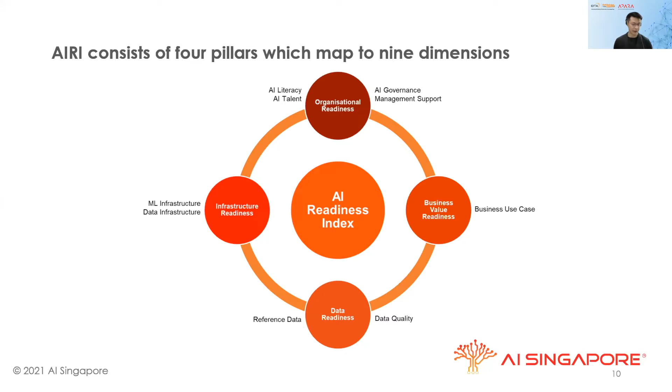So these are the four main pillars we look at. For organization readiness, we are looking at whether the organization has the foundations to embark on an AI initiative. Because without, for instance, good management support, more likely than not the AI initiative will fail, because AI will often require changes in business processes. And without backing from senior management, it will be very hard to get different departments to come together to embark on that AI initiative.

For business value readiness, we're looking at whether any use cases have been identified in the organization and the potential value they bring, because otherwise management might not see it as a priority to put resources into certain areas of the business and apply AI to them. For data readiness, we're looking at whether the organization has reliable, quality data, because AI is trained on data. Without data being collected by the organization, it will be very hard for AI engineers to do anything.

And lastly, for infrastructure readiness, we are looking at whether the company has the right infrastructure. We are looking at machine learning infrastructure, because we simply cannot deploy an AI model on your laptop, even the latest one, because the computing resources required by AI are far more intense than what your laptop can handle. So we're looking at whether the organization has sufficient IT servers, for example, or is using cloud computing to support rolling out AI solutions. So that's the four pillars.

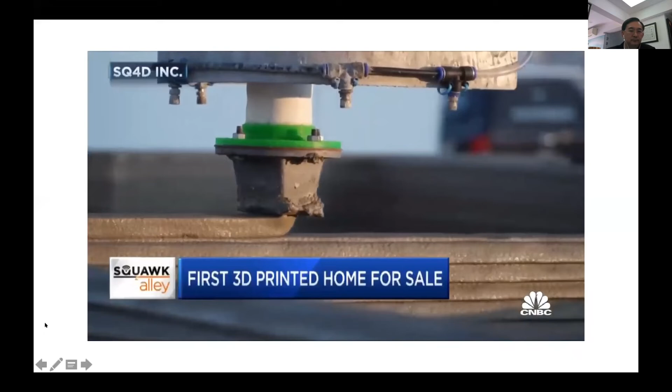It may look like toothpaste, but this 3D printing technology is spitting out a 1,900 square foot house. The concrete foundation, interior and exterior walls, and utility conduits. This is the final product. We're trying to build houses in half the time for half the price. New York-based SQ4D printed the model home in about 2 days with barely 3 workers, and it's cheap. Our profits will be higher, and we will be able to show that with more projects that we do. How do you sell a 3D printed house? I'd like to think it sells itself. What is the weirdest thing anybody has ever said to you when they walk into this place? Oh man, is it plastic?

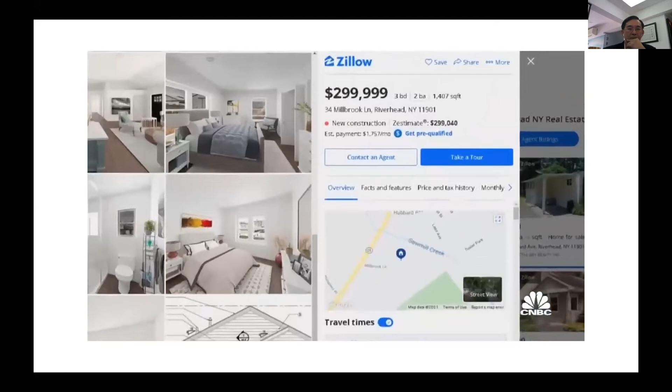The company now has the permits to build on this site down the road, the first 3D printed home for sale to the public. 1,400 square feet, 3 bedrooms, 2 baths, listed at just under $300,000. That's about half the price of a comparable new home in the area. The offers are in the thousands. People are seeing the price across the nation and loving that. It's put out layer by layer by layer, 2 inches thick. Potential buyers like the Johnsons from Kansas City are already lining up. We've been looking since September of last year, and in the 2 counties it's just impossible to find anything at this price. And this quality.

So this is the result, the raw result of 3D printing. It's kind of like concrete corduroy, but if you don't love this look, they can smooth it out for you and make it look just like a regular wall.

But for the home builders, this is a real game changer. Right now, they're up against a severe labor shortage as well as skyrocketing prices for lumber, and both of those are combining to just make their costs really, really difficult right now. So this could address both of those. Back to you guys. Yeah, Diana, that's amazing.

And the argument now largely seems to be price for 3D printing and what it can do in real estate. But 3D printing technology should allow companies to create shapes, perhaps do things with engineering that are impossible under traditional methods. Do you think that there's a premium end of this 3D printing and construction market?

Absolutely. In fact, we were talking to the builder about what the outside of the house could look like, and he was saying that you could put literally any image into the 3D printer and customize the outside of the home so it would look like shingles or it would look like a different type of wood. You could even put your face on the front of the home if you wanted to. So the possibilities are really endless with the technology.

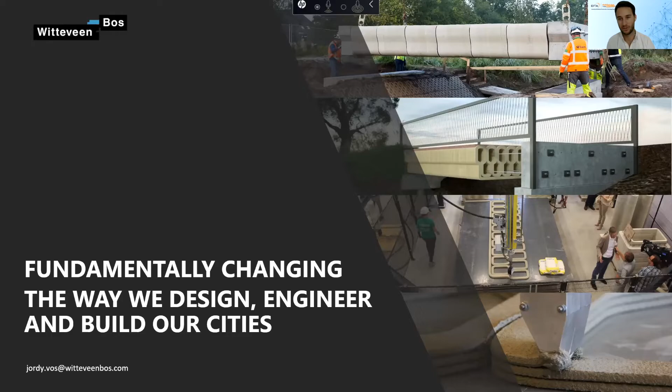So in this session, I'm going to talk about how we are fundamentally changing the way we design, engineer, and build our cities, which includes 3D concrete printing. I will get to that by the end of the presentation, so please hold on. As introduced, I'm working for Witteveen+Bos. We are a consultancy and engineering firm. We work on all kinds of projects related to infrastructure, building, water, and environment, almost 4,000 projects per year. My team focuses specifically on digital construction, which is all about automation and digitalization of the construction industry. We're active in 11 countries, headquarters is in the Netherlands, and I'm based in the office in Singapore.

So let's start with this. As civil engineers, we're responsible for big accomplishments in the construction industry. Think about almost 1 kilometer high buildings in dense city areas, mega dams that produce sustainable energy, massive bridges and tunnels that connect people throughout the world, and dikes that protect countries against flooding.

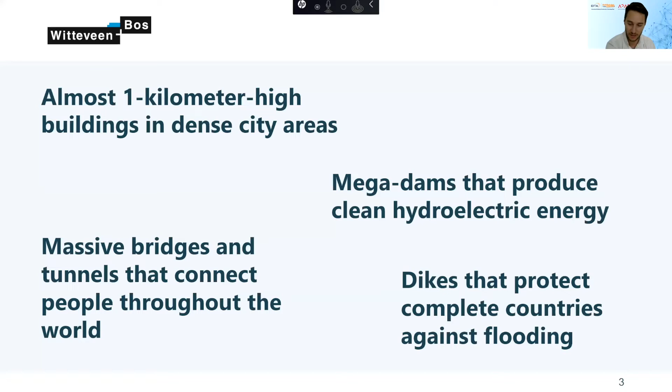But the industry is also, as you probably know, facing some challenges. It's responsible for almost 39% of worldwide CO2 emissions, which also includes the operational phase of the buildings. And productivity is quite a bit lower compared to other industries, almost 30%. And there are more issues, as you are most likely aware. But as one of the biggest industries worldwide, almost 13% of the world's GDP, making an impact on our industry will make a very big positive impact worldwide. So that's a big opportunity. Therefore, I think we should change the way we design, engineer, and build our cities.

So let's have a quick look at how the construction industry is typically organized. It's very project-based, right? Every project, we start from scratch. We develop a project with a certain economic idea behind it. We design it, engineer it, all completely from scratch. We set up the whole project organization with all kinds of parties involved, often temporary subcontractors, even temporary staff, temporary rented equipment. And with all of this together, we construct the building bit by bit in a manual way.

All of this together leads to a very fragmented industry, a lot of manual work, a lot of parties involved, very hard to coordinate, almost no repetition or standardization, and therefore very hard to industrialize. Complex contracts because so many parties are involved, a lot of risks, and the risks are often moved down the value chain instead of actually being properly addressed.

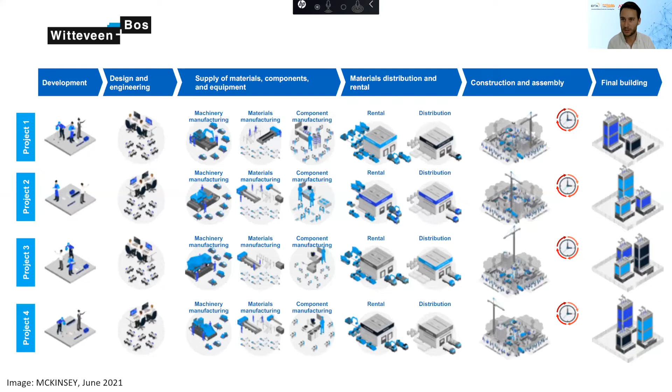And this leads to the fact that there's almost no economies of scale opportunities, no industrialization, and risks for time and budget overruns. Almost no budget left for R&D. But there are quite some catalysts and emerging trends right now that will change this in the coming years.

As was mentioned in the video just now, a shortage of skilled labor in the construction industry, increased need for affordable infrastructure and housing, as was also mentioned in the video, but also stricter regulations for sustainability, safety, repeatability, increasing requirements from customers and owners.

But on top of that, we have also the emerging trends like 3D construction printing and other industrialization, like automated precast lines. Digitalization is getting there. BIM is almost a standard in any project. New and sustainable materials and new entrants are entering the market. And I think the presentation from Bina after my presentation is a great example of a typical new entrant for the construction industry with a new approach and vision on the construction industry.

So based on this, the expectation is that the industry will change. And this is not invented by myself. This is coming from McKinsey. And they think that the construction industry will go from a project-based approach to a product-based approach. So we work more with standardized products, and buildings are designed with those standardized products.

And those products are manufactured in places who are specialized in producing that part and can deliver a consistent high quality at a consistent price. And the construction process becomes more assembly of all those building components. The value chain will become less complex, less parties involved, companies will become specialized, and certain larger players will control or at least overview a large part of this whole value chain through digitalization. And AI is an important part of this, for example, to predict what is going on in the processes.

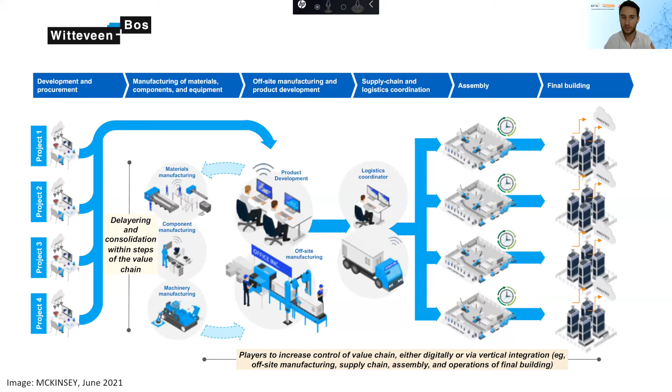And therefore I would like to show you a few seamless digital tools and processes that we are working on that fit perfectly to this. And I will end with 3D concrete printing as one of the tools. So one of the things that we're working on is, for example, parametric design. With parametric design, we can create an endless amount of variations of what I call a design family. So it's a similar looking design, but you can change the design by just updating the parameters, from the length, the width, the height, even the shape.

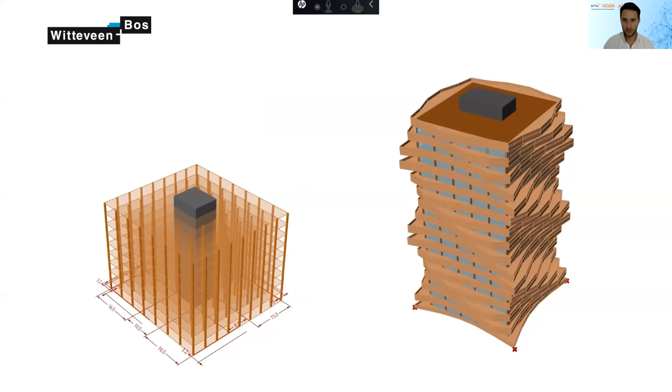And we can generate all these designs with just a mouse click, because it's what we call a computational design. It's basically set up with a sort of software script that generates the design based on our input. So it takes a bit of time to set it up, but once it is set up, you can generate all these designs. And this is also product-based, right? Because there's a lot of repetition in the type of building components in these designs. So that helps a lot to work towards it.

Moving on to the engineering stage, there are a lot of disciplines involved in the engineering of a building. Structural engineering, acoustics, mechanical engineering, and so on. And they all need to exchange a lot of information with each other. And because every project is so new, they need to start from scratch every time again. Therefore, we are developing a platform called ANT to connect all these different applications with each other, and also take data from databases as starting points for those calculations.

So with a product-based approach, we can use all those properties from those known products and use that in the structural calculations, for example, without figuring out every time again what the properties are of this wall and which concrete we need to use, all standardized, speeding up engineering processes a lot and avoiding, for example, mistakes in those processes.

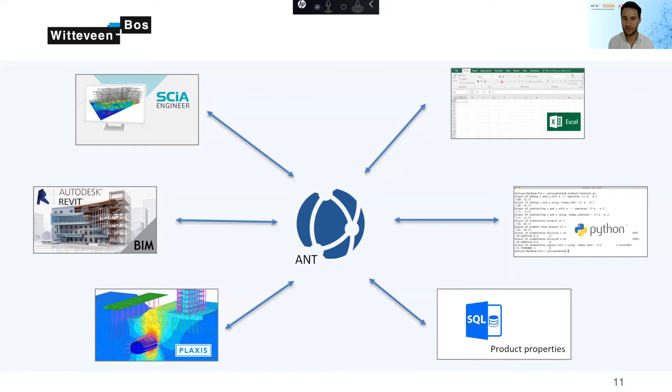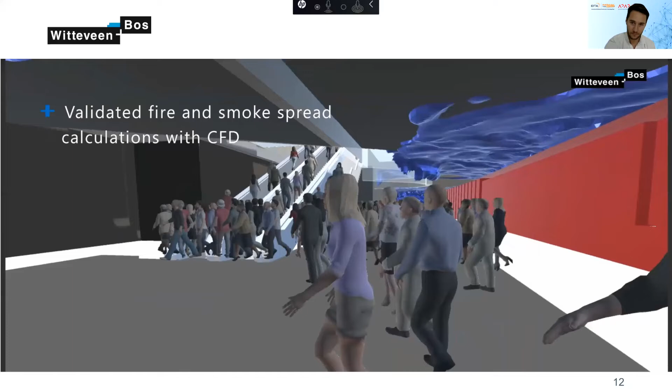And we do the same with, for example, infrastructure designs, where we have developed a driving simulator so you can drive over a highway in virtual reality.

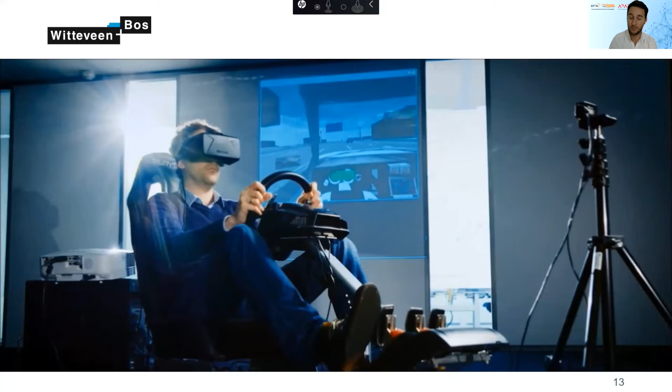This is all based on the digital 3D models that we create. And the traffic that you see in this kind of serious game is coming from real validated traffic simulations, certified traffic simulations that are used to calculate if a junction is, for example, able to handle all the traffic. And this is live integrated in the serious game, so you can actually experience real traffic in the game and validate the design together with your stakeholders.

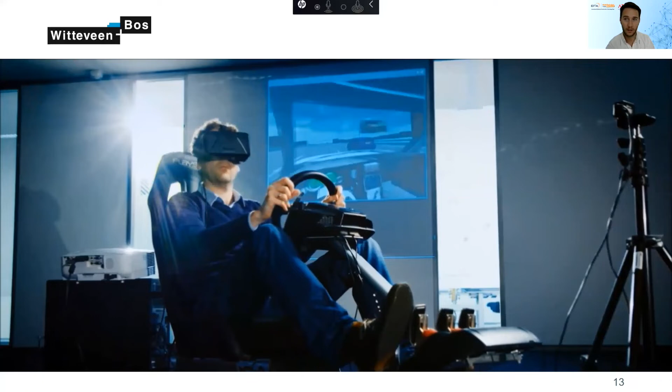So this all helps to get your stakeholders on board, make informed decisions, use your digital data, including AI, to make the right decisions. And also during the construction phase, we are developing an online platform that helps to manage all of this. We are doing this together with the Housing and Development Board.

This is a typical single source of truth that was mentioned in the previous AI presentation, where we collect all information related to the design, the manufacturing, the assembly, contract issues, documents in a central place, manage it all from there, single source of truth, making the information available for everyone, anytime, from anywhere, in an online web-based platform. So this is completely developed in-house for HDB.

And the beauty is that all information is connected to each other. So changing something here will also change something there. Or if next week the assembly of a certain amount of components is planned, but the manufacturing is behind the schedule, we can see that in the platform and we can adapt to that to avoid, for example, any delay.

So this typically avoids budget overruns because we closely monitor everything, time overrun because we signal potential delays early, and we avoid rework and mistakes because everyone is making use of the most up-to-date information. So no outdated drawings anymore, and so on.

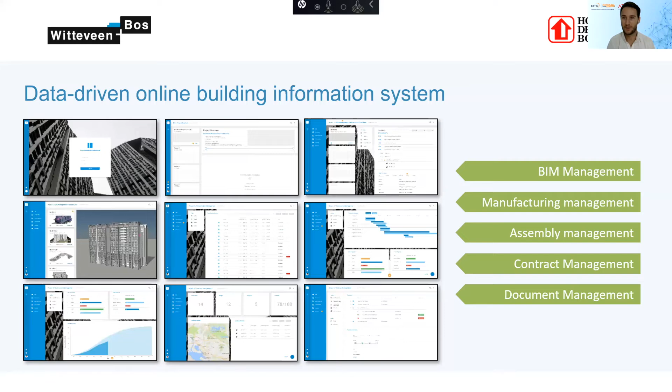And then moving over to construction, this is where 3D concrete printing comes in. This is technology that we are now working on for almost 6 years already. This started for us with a research project in the Netherlands at Eindhoven University with a whole group of partners. And meanwhile, we are working on this 6 years and we are working towards pilot projects to implement this technology with a large group of partners involved.

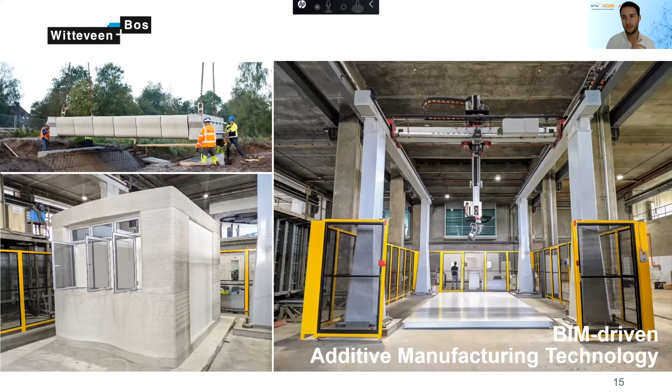Additional design freedom because we don't need those flat formwork panels anymore. We save on manpower, save on material. We only use material where we actually need it, and I will jump into this a little bit more. But also this you can see as a kind of product-based approach where components could be manufactured off-site, for example, for high-rise, modular, and stacked.

And there's still a certain amount of design freedom when using 3D concrete printing because you don't need the formwork, but there is a certain standardization in the connections, dimensions, the waterproofing, all those kind of things that you can standardize. But without the formwork, we can still offer design freedom in a product-based approach.

So let's have a closer look at construction 3D printing. How does it actually work? Well, construction 3D printing is completely centered around a robot. And this can be any robot actually, because the whole idea of this robot is that it's moving a printhead. So the robot can be a typical robotic arm that are used a lot in automotive manufacturing. Can be a gantry robot, and there are also quite some robotics developed specifically for construction 3D printing. But in the end, it's always moving the printhead.

The printhead is extruding concrete, and this concrete is placed layer by layer to form the desired object. And the concrete is coming from a mixing pump that is mixing a dry material with water and pumping it to the printhead. All of this is controlled by a robot controller that includes the robot and the pump and the mixing process. And this robot controller is receiving instructions. The instructions are coming from a file that we generate based on our 3D model.

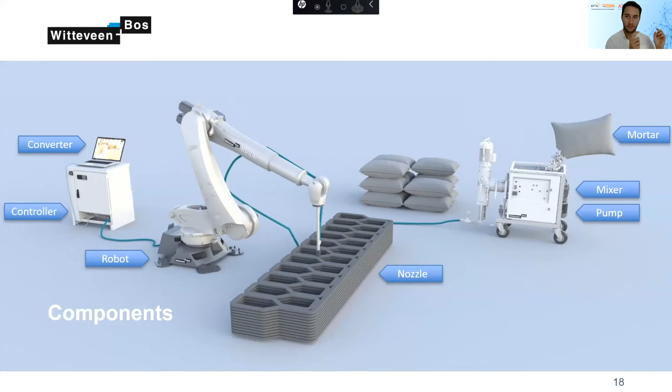So this is again the link between us as engineering firm and 3D concrete printing, which is more basically for a contractor who's actually doing the execution. But we have the 3D models, and we can send those 3D models to a 3D printer. So there's a very short lead time from design to manufacturing, which brings up a lot of opportunities.

If you control all of this in the correct way, you're able to 3D print concrete components layer by layer without any formwork, barely any labor involved, and no material waste, for example, because we only use concrete where we actually need it.

So I really believe in this technology, not only because it's 3D printing, but because it's a great base for many other robotic technologies that can connect to this or work in the same way; it provides a kind of platform to make all of this possible. Think about, for example, fabrication of rebar cages that in other research projects are being done with robotics already. This can be integrated in the same type of robotics, produced based on the same type of 3D models, managed with the same type of software.

So that's the rebar, but also the surface finishing can be done already during printing with an additional robotic device. And after printing, you can think about the so-called single task robotics. We can do the tiling or painting, like spray painting, all those kind of things. So that all can be done in the same kind of platform. And that is why I believe in this technology.

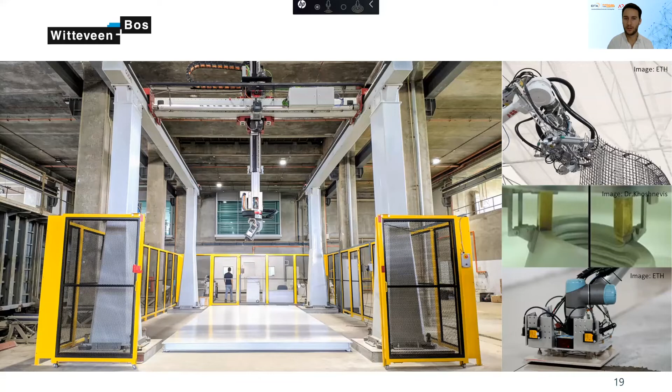So like I say, for construction 3D printing, we have a relatively product-based approach where we develop parametric objects that can be 3D printed directly without the need for any design and engineering. Just type in your parameters, like you want urban furniture. Here we have 3 examples: an urban bench, a planter, which we call a green wall because you can place the plants in the wall, and a staircase. So whatever dimension you need, you type it in, the length, the width, the height, and it generates the design, and we can send it directly to the printer.

And we have set up the model in such a way that whatever parameter you type in, it will be printable, right? It will have a certain limit for the length, the height, and the width to make sure it's printable. So this is where we save a lot of time on the design and the engineering.

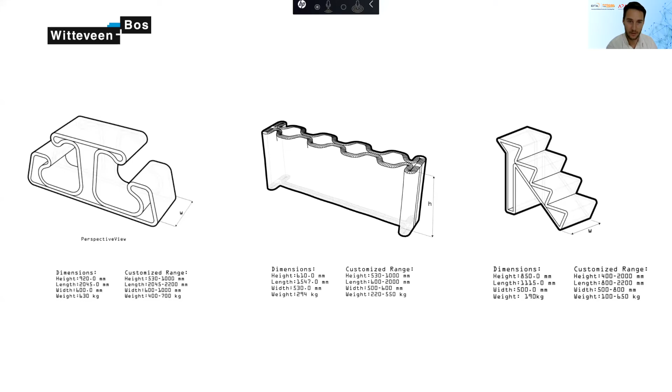And we are working on a pilot project to apply all of this in a true construction project. An example of that is Project Milestone, which is done by the group in the Netherlands. We've also been working on this research project since the very beginning, and they are developing livable houses where people can actually live. That means they're permitted, follow standards, design codes, and so on. There's a lot of research work going on in the background that I don't have time to show today to make all of that possible.

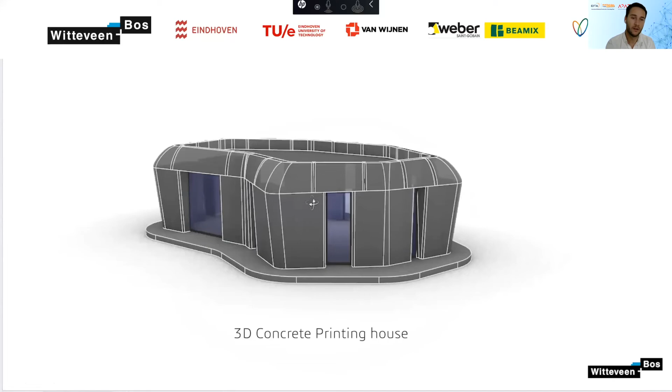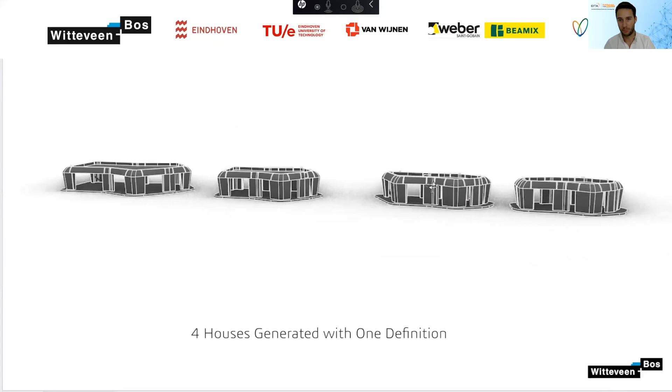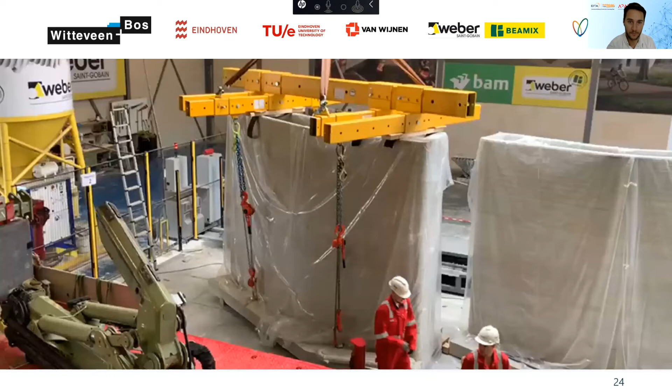And this already takes into account the printing capabilities of the printer that is supposed to print it, in terms of size, dimensions, connections, and so on. That design can be sent to the 3D concrete printer. Of course, there is still quite some verification in between, I'll get back to that, to make sure the structure is safe. But the printer can directly operate from the 3D model, print the building components, and then we can transport them to the construction site.

So the first house was opened last month. The first residents are now living there. So that's proof that it is a true livable house. If you look inside, it looks beautiful, just like in the video that you saw earlier. Also in this house, the printed layers are still present in certain areas to show it is 3D printed, with a very consistent layer that actually is a nice architectural feature of the house. And to me, it definitely looks like a great house. I would love to live there.

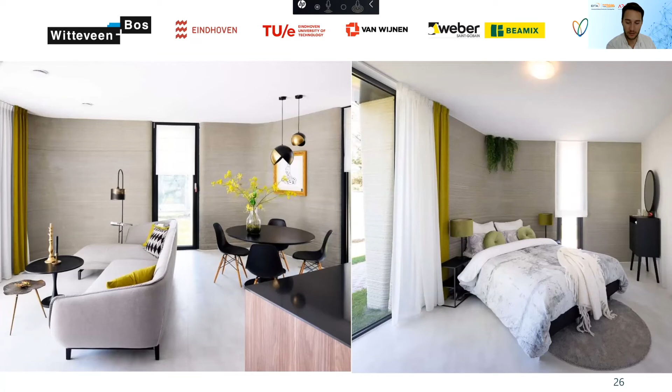So let's talk about why we would do all this. Why would we 3D print a house? Well, of course, the tailor-made houses that are generated with the parametric designs allow us to create a house exactly the way you want it, with a lot of design freedom. Cities don't look boring. You can create neighborhoods where every house looks a little bit different and gets its own character. These houses can be printed on demand by the 3D printers based on digital designs.

Short lead time, it can be done faster, less labor, a way less complex supply chain. As consultant engineers, we're sending it to the printer. So the whole process becomes simplified, with way less chance for errors and mistakes, for example. And we can use materials effectively, with no production waste.

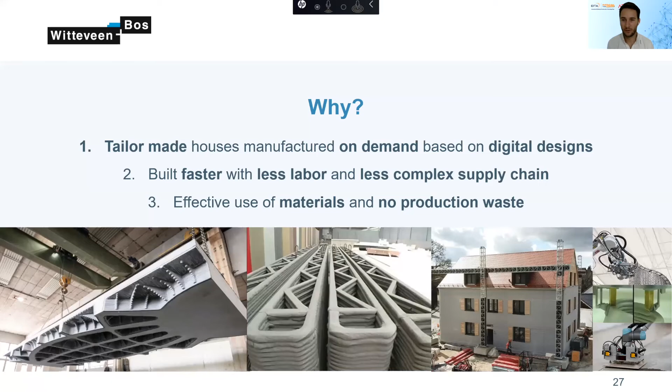Yeah, the technology is still in a relatively early stage, I would say. That means there is no design code or standard yet that tells you how you should calculate or design such a structural component or complete house. Therefore, we make use of the Eurocode, design assisted by testing. There's a whole testing program to validate that whatever we calculate is correct and works the same in practice.

We do material tests to find out the material properties. We use that to do calculations. We produce a scale model and do destructive testing to test if our calculations were correct. Then we print the final model, test it one more time to check if it can handle the design load, for example. And by using a product-based approach, we can reuse all of this in the next bridge.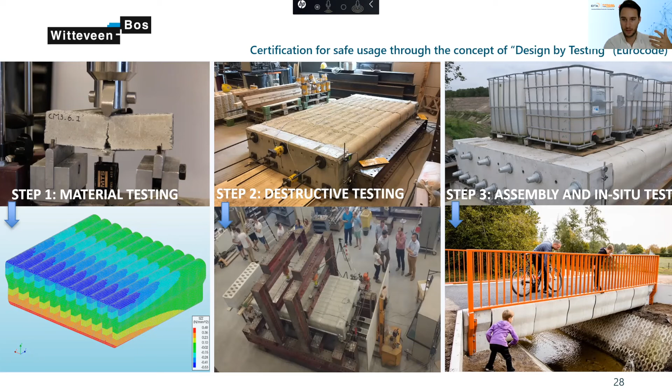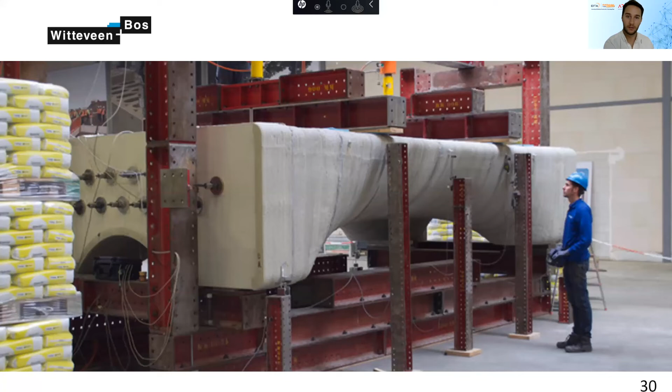So we're working on a bigger bridge right now. It's longer, but the span is similar. So it has similar bridge components, slightly different shape, but similar principles. And in this way, we can evolve the bridge and also reuse a lot of information and data. And this next bridge is now being assembled at the moment, actually.

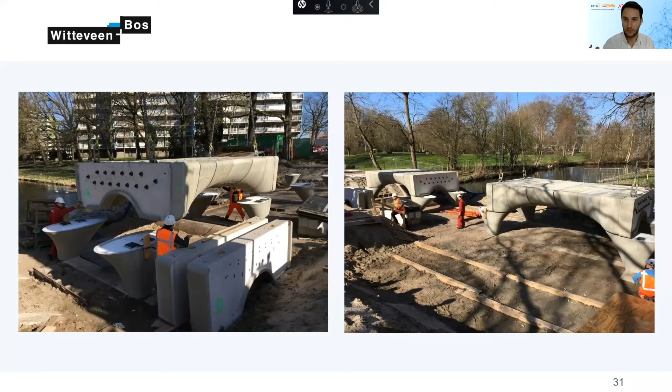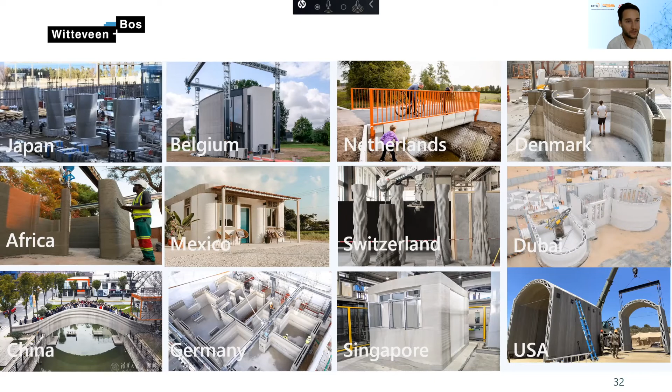Yeah, so 3D concrete printing is no longer something that just happens in a lab, like how it started for us 6 years ago. All around the world, you can find pilot projects in Asia, in Europe, in America, South America. So it's really entering a high technology readiness level. And also a lot of different applications are being, let's say, experimented with.

From affordable housing to premium housing, printing those houses completely on-site or off-site, up to printing just building components, complex shaped columns, or repeating building components like cladding. So there's a lot of possibilities and a lot of opportunities to explore.

And you see that the 3D printers also start to shape towards a specific application. Like affordable housing printed on site will have a typical printer that is focused on that. A high quality component with a very complex shape will have a different type of printer, different type of printhead for usage off-site.

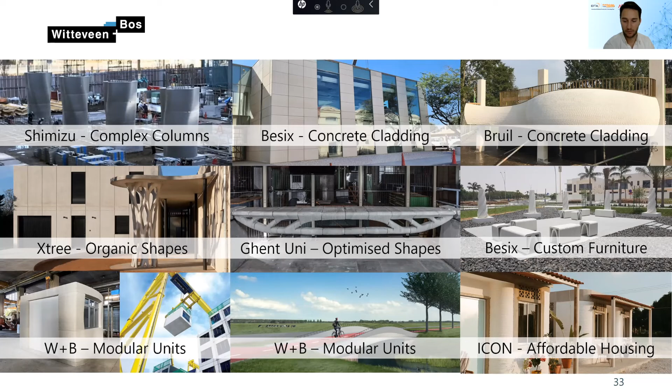So we are now opening up what we call a Center of Excellence in Singapore. The goal is to make 3D concrete printing available for everyone who wants to experiment with 3D concrete printing, learn more about it, or even do a pilot project. And we have a whole range of services from consultancy to design, engineering, and actual 3D concrete printing services to make it possible. The center will be opened up soon.

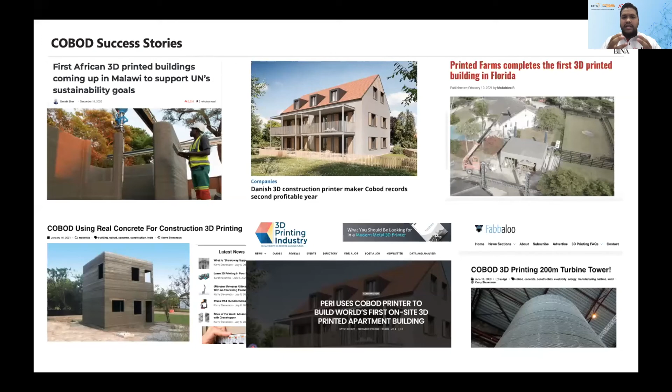Now, besides that, they have many success stories around the globe and secured many international partners, such as GE, LafargeHolcim, and recently, a few days ago, JGC Japan is also on board with them, utilizing their printer. In India, they have L&T, and in Dubai, they have MR Group and many other stakeholders. In fact, PERI Group is a shareholder in their company.

On top of that, COBOD, alongside its partners across the globe, including Bina, has a comprehensive plan, not just to tackle the issue that we have at hand, which I mentioned regarding affordable housing, but also to boost and transform the construction industry in Malaysia and Singapore and move towards the Southeast Asia region. Now, we aspire to be the 3DCP technology enabler in Malaysia and further establish this technology in Malaysia and Singapore for a start.

Now, for the record, we have ordered 2 sets of printers, and coincidentally, today, we will receive the first printer, arriving at our port. And we are very excited about this, and we hope to get the printer running and to showcase the capabilities of 3DCP technology very soon in Malaysia. And we will continuously work with government agencies, of course the regulatory bodies, and learning institutions, to further enhance the application of this technology in Malaysia.

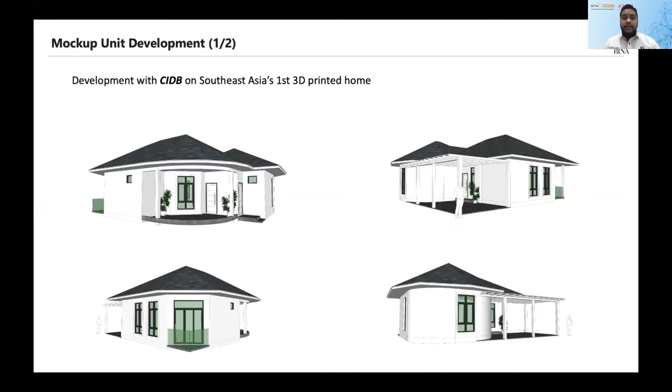Now, for our current progress, Bina is currently working with the Malaysian Construction Industry Development Board, CIDB, which is quite similar to HDB in the context of Singapore, to print the first 3D printed home in this region. We will test our newly arrived printer to print complex structures and designs to overcome the limitations that conventional construction faces.

Based on our projection, printing the walls of the house takes less than 48 hours. And based on our cost projection, we could achieve 30 to 40% cost savings compared to the conventional or traditional construction method for our first 3D printed home. However, bear in mind that this is the first time we have our hands on the printer, and we do expect some setbacks. But as we operate more and more, we believe that we'll be more efficient and competent in the near future.

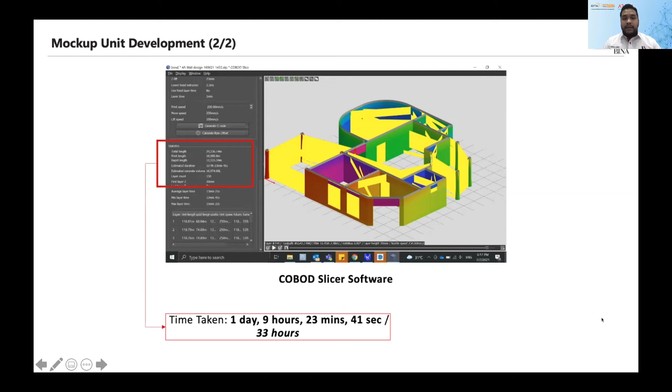So now let's go to the interesting part, the benefits of 3DCP. I'm sure Jordy has mentioned some of it. As I mentioned earlier, speed is definitely a key benefit, where we could achieve higher productivity in our development that leads to cost savings. And as for labor requirement, for COBOD's technology, we only require 2 people to operate the printer, thus reducing the dependency on foreign labor, which is really a plus point, especially during this pandemic.

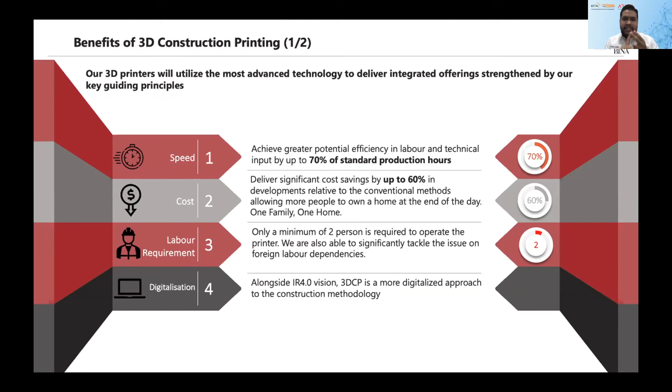Automation in the construction process, adopting IR 4.0, moving towards digitalization of the construction industry. With high technology application, we are able to improve and upgrade local contractors' skill sets to move away from the normal construction problems, especially related to the 3D acronym: dangerous, dirty, and difficult jobs. Flexibility of designs: we're no longer bound by conventional constraints.

With software and machine involvement, we can effectively reduce errors in the development process, thus reducing wastage. Mobility advantage: our gantry system can be assembled and disassembled for easy transportation, and it takes less than 4 hours installation time.

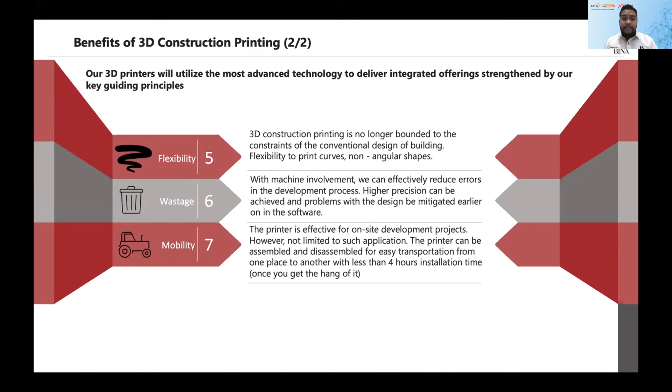And of course, moving forward, the application of this 3DCP technology is not just on the wall and foundation, but moving forward, Cobod International partners are inventing new upgrades on their printers so that they will be able to print more components of the construction process.

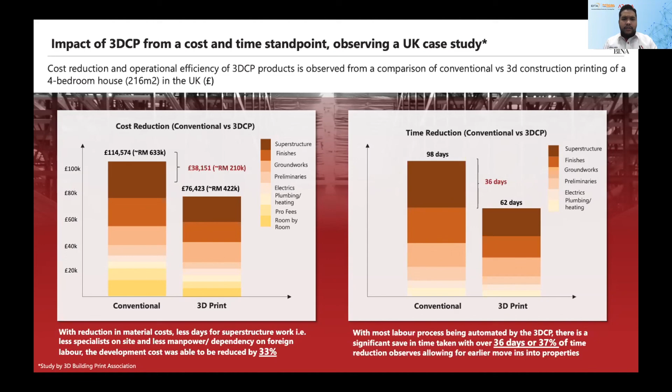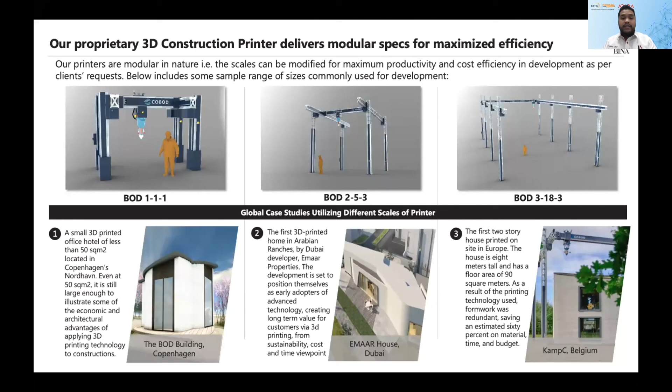Now, with that being said, I'm sure all of you are wondering, how does 3DCP really work? Let's go to a little bit of the technical part. Now, as you can see here, Cobod's printer is a modular design, and we utilize the gantry type system. You can decide the size of the printers by its modules, where you can add modules to fit your project specification. Now, the whole journey begins from your device, whether it's your laptop or iPad, where you will create your 3D format design, whether through Revit, AutoCAD, BIM, or any other 3D software.

And you will then feed it into Cobod's proprietary software, which we call Cobod Slicer. The software then instructs the printer on how to print, and you can also make configurations in the software itself, where you have the freedom to determine the speed of the printer, the movement, and the method of printing. Now, the printer would then give orders to the batch plant to mix according to the requirement of concrete material you desire. The material would then be processed, transferred to the pump, which pushes the concrete material to the printer, and your building or structure will be printed.

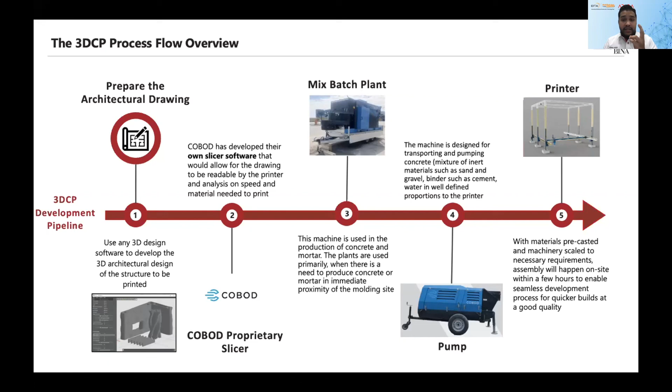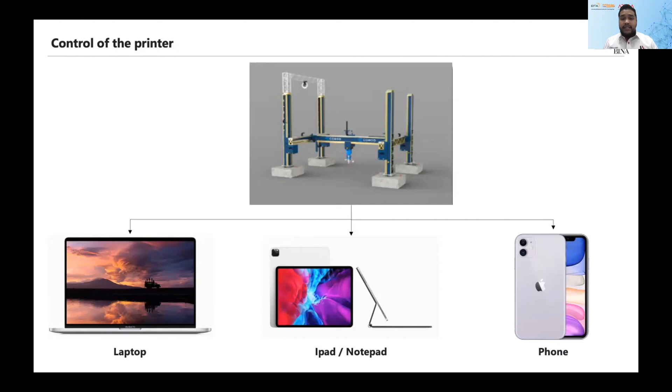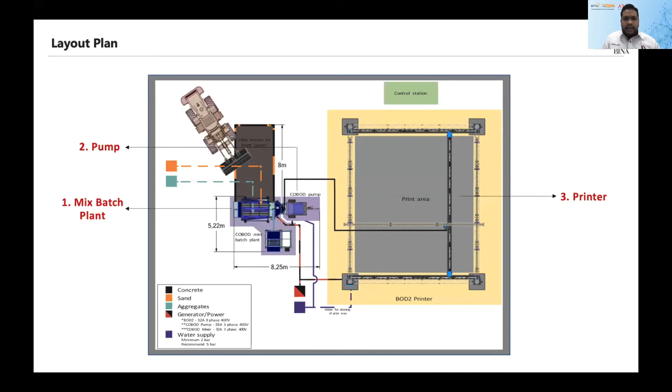Now, the second question that probably comes from your side is what kind of material can be used? Now, with Cobod technology, the material recipe is open source, which means the user will determine the material recipe themselves, giving flexibility in the concrete material that can be used in your development. Now, more questions must be in your head. How does the plumbing work, how are insulation and electrical conduit installed?

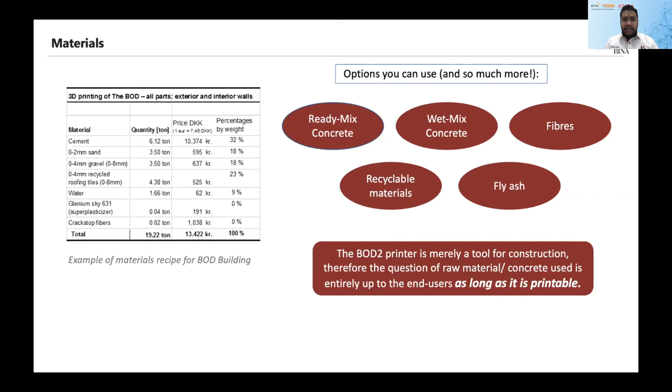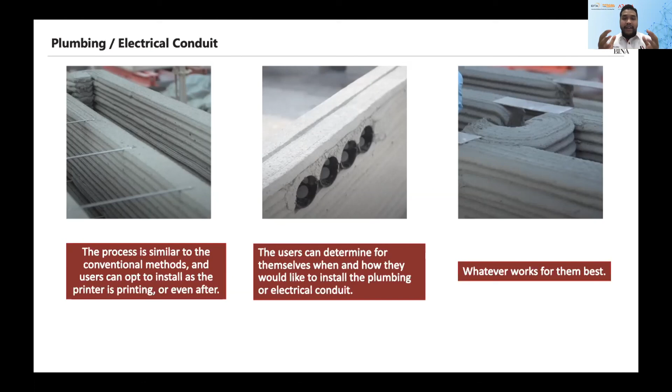With all these questions in mind, ladies and gentlemen, what we would like to emphasize here is that just like the concrete material and the design, the end user will determine how it's going to be done. It is a very flexible process with 3DCP technology, especially with Cobod's technology. And it's very important to note that the printer is just a tool. You as the end user can decide how to utilize the tool, giving more control and flexibility in your development process.

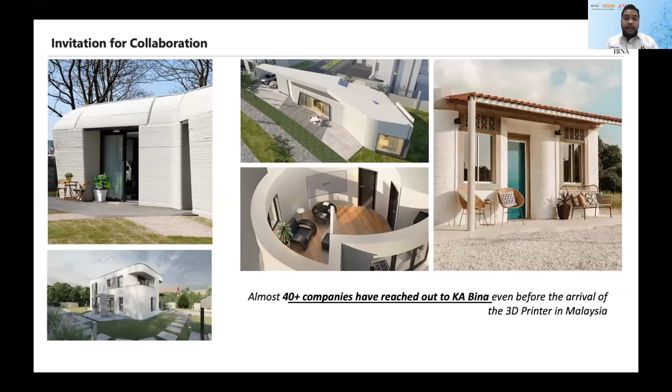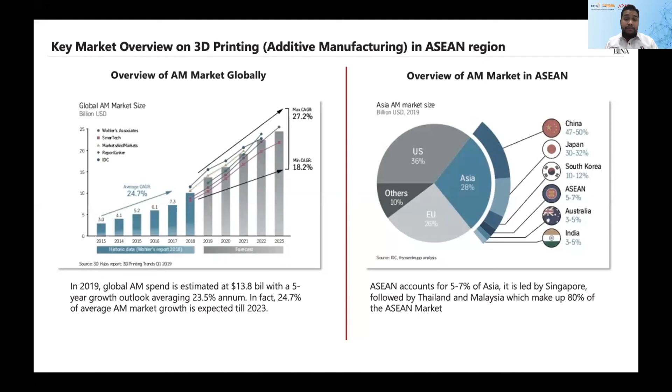We have also identified several frontiers to boost the adoption of 3DCP in this region. Some of these frontiers cover the R&D process to improve the technology further, to develop the right concrete material, which should be locally sourced. That's very important. We have to focus on developing the 3D printers themselves so that they fit local needs. We have to provide the right material and modules for training and capacity building purposes moving forward. And last but not least, we shall connect local companies with regional players because we feel that such global engagement can allow for more creative and innovative solutions to be developed.

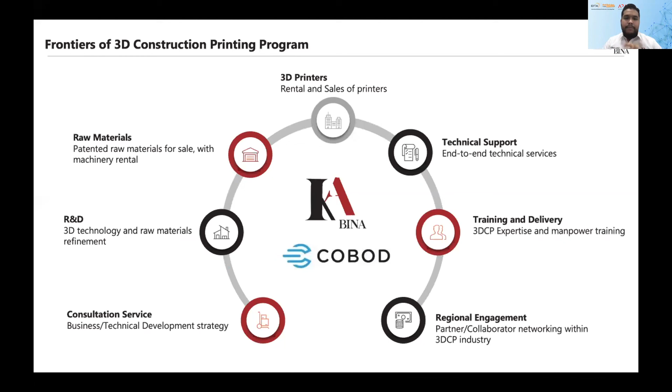Finally, on behalf of KA Bina, alongside our trusted principal partner, Cobod International, we call upon all industry players to join us and be part of this journey to make construction great again.